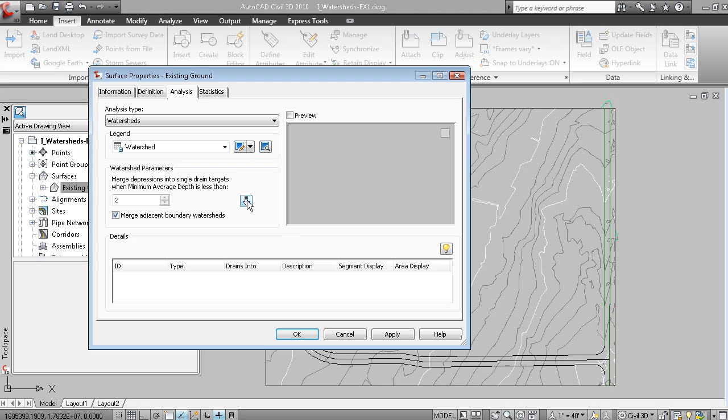If I click this down arrow, we now have all of the watershed areas delineated. These are all boundary segments, and if we scroll through, you can see there are different categories of watersheds. That's the analysis. Now, in order to display that, you need to use a surface style to display the watershed boundaries. Under the Settings tab, if we go to Surface and Surface Styles, you can see we don't have one here. Let's right-click on Surface Styles and create a new one.

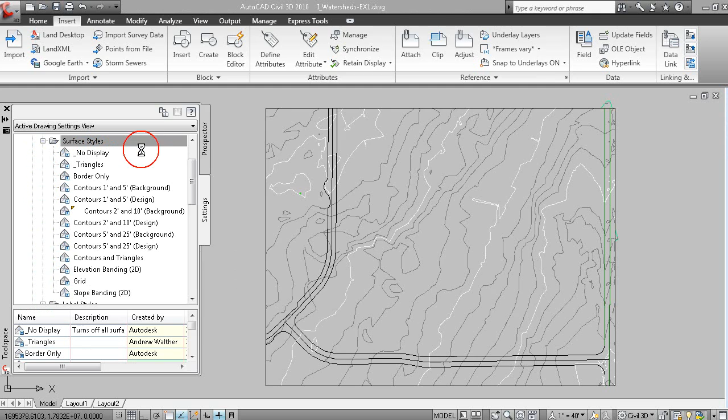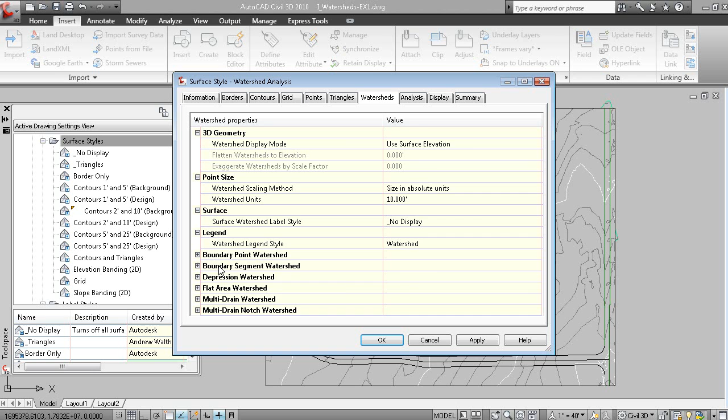Under the Information tab, call this Watershed Analysis. Under the Display tab, we'll turn off everything except for watersheds. If you click the Watersheds tab, you can see all of the parameters used to control the display of the watershed: the boundary points, the boundary segments, and so these are essentially all the colors. If I click OK, we now have that style called Watershed Analysis.

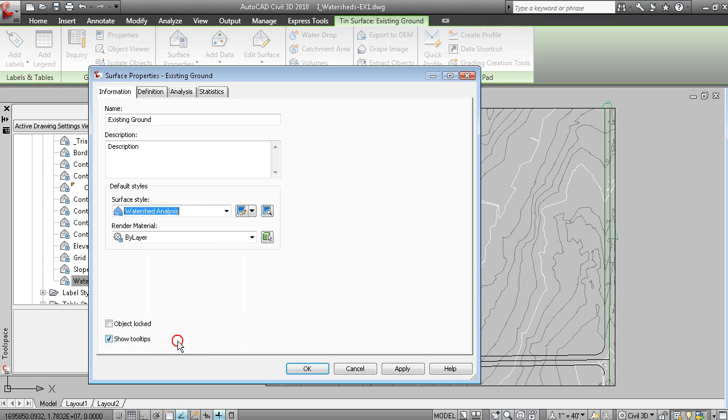Now we can assign that surface style to the surface. Let's grab the surface, modify the surface properties, and under the Information tab assign the style called Watershed Analysis. That will then display and delineate the different watersheds in the drawing area. You can also create a table to show the data.

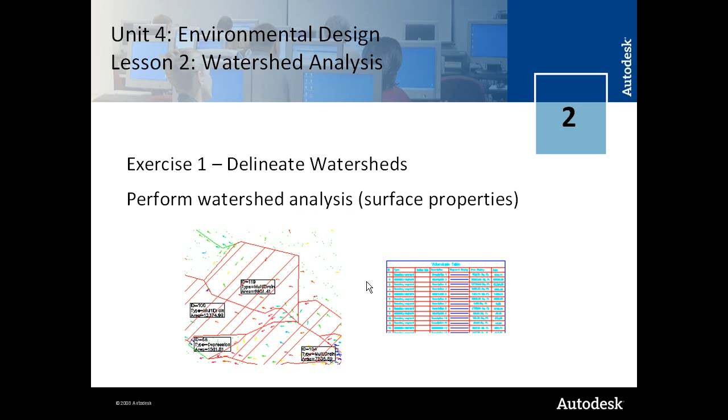In the second exercise, you visualize runoff paths, essentially using a style to show you the direction of slopes, but also using the water drop feature to show you the direction of flow. Let's have a quick look at that. We'll grab the surface, go back to surface properties, and assign the contour style.

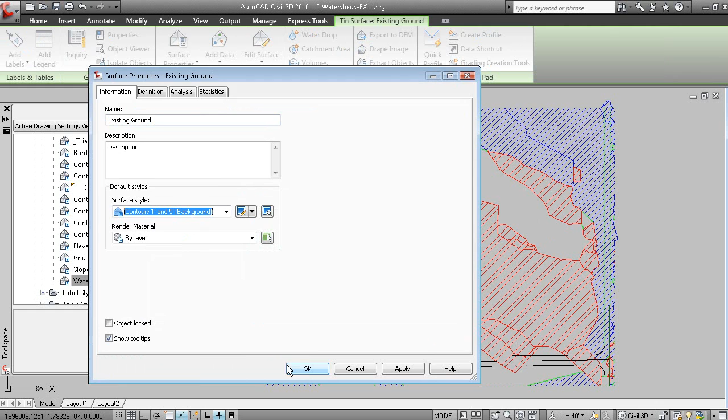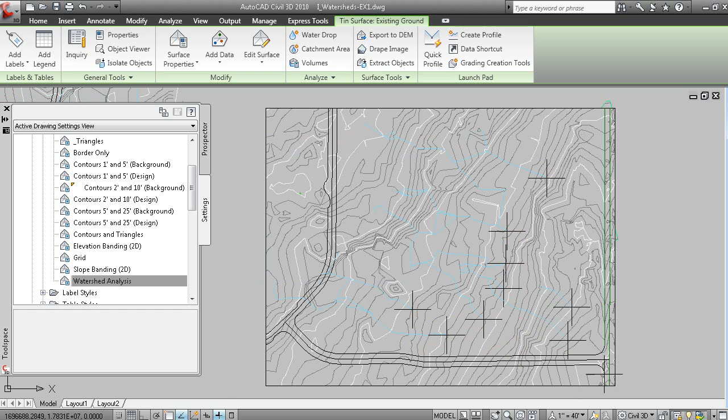If you grab the surface and click Water Drop on the contextual ribbon, we can create a 2D polyline, and wherever you pick a location, it calculates the direction of flow. So it's very easy to see that the direction of flow on this site is running from the southwest to the northeast.

That concludes the discussion on watershed analysis, which is in Lesson 2 in Unit 4 of Environmental Design for the AutoCAD Civil 3D 2010 education curriculum.